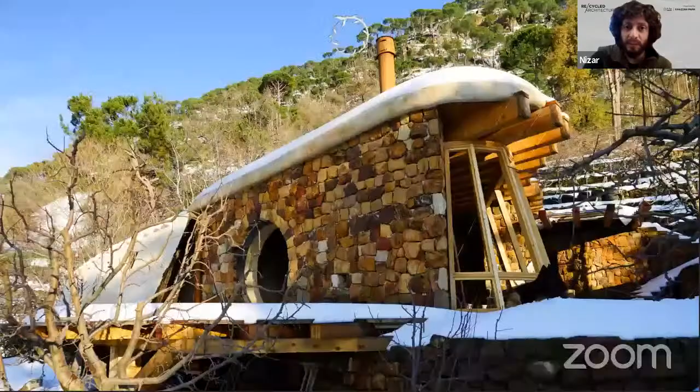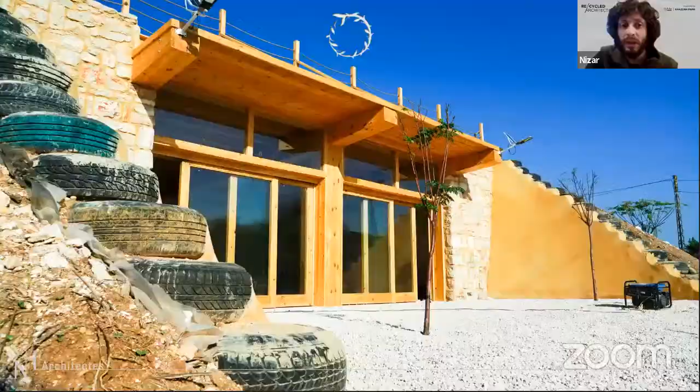It's melted in, and I assure you that inside the building the temperature is amazing in the summer. Here also, during another hike, this is a cub building also built with stone, and you see how discreet it is. These kinds of buildings inspired me a lot, and I was wondering why don't we take some of this knowledge and try to reimplement it in modern architecture in a subtle way, mixing it with modern scientific knowledge. So this is the Lifehouse, the prototype I did in Baskinta, which integrates a lot of ancestral knowledge. And this is another building we did, a multi-purpose hall with the United Nations Development Program in the south of Lebanon.

So one source of inspiration was all these ancestral techniques and buildings, but another source for me was Michael Reynolds, an architect interested in recycled architecture who created techniques of building with tires in the 70s, during the petrol crisis, because people felt at that time that we were very dependent, and we still are, on every petrol-based product. In this period he decided to develop techniques that consisted more of reclaiming thrown-away materials and doing something out of them.

So he did a lot of experimental things. He's an icon in recycled architecture. But also another guy whose name is Malcolm Wells, and he's also an amazing architect who was more into buried houses, which is also a very interesting concept in architecture that allows us to hide the buildings in nature, to reduce the impact of the building on the environment visually, and also get a very high efficiency thermal-wise, through the thermal mass of the earth. So yeah, this is one of the icons of buried houses, also Malcolm Wells. But there are also other sources of inspiration, other architects from Europe, from France, etc. These are the main ones.

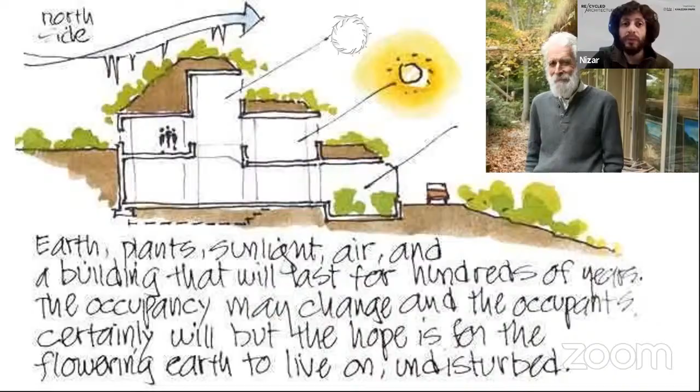Okay, so Nizar, tell us a little bit. What is your philosophy on the role of recycling in architecture, and how do you apply that in your projects?

So recycling means recycling garbage. It's a modern concept to talk about recycling, because in the past there was no garbage, no trash to recycle. All materials before the industrial era were mainly natural, and if some material like metal things were thrown away, they used to biodegrade, so we don't need to recycle them. They also used to reuse and remelt the metal to make something else out of it, so the approach before the industrial era was fully sustainable. They didn't have the choice but do it this way, because there were no plastics and petrol products.

One notion I noticed in modern days is that all of us live in a house where there is a garbage bin. We were born next to a garbage bin where we throw the Kleenex and things like this. So it's something that for us is part of our life, and we consider it natural, very normal. But actually, it's completely abnormal. It's something that was the result of this industrial era, and before, as I said, that didn't exist.

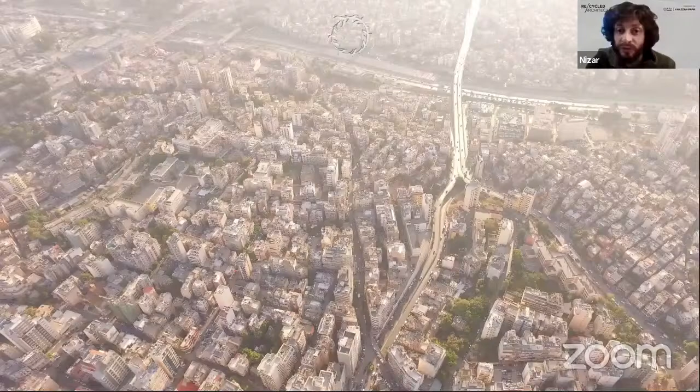So today we're overcrowding the planet with our buildings. We are invading it, and these buildings are not designed to biodegrade, to respect nature. As you see, we have a lot of concrete jungle here - this is an example of Beirut.

So I will talk about the phases one by one. First, we have the extraction of products from nature through quarries and mines, and the way we do it is very harmful for nature. We are sterilizing the soils and disfiguring the environment. This is a quarry in Lebanon - I took this picture from a plane, so it's huge.

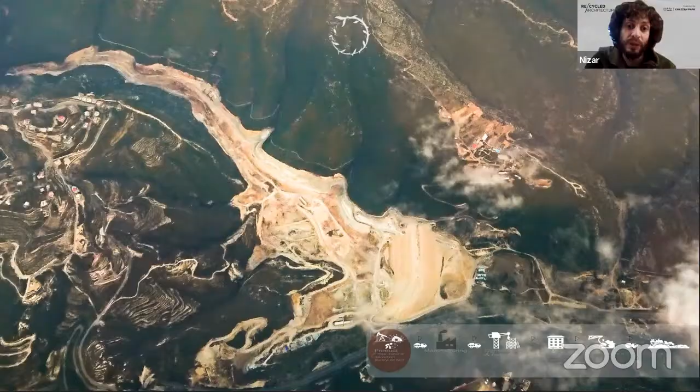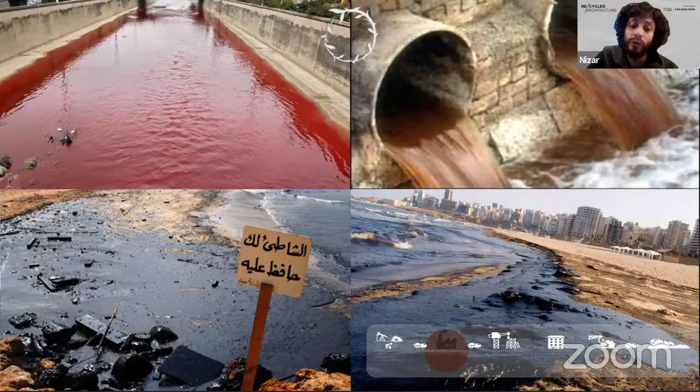So once the building is done, we consumers buy this building, and a lot of buildings label themselves as sustainable because they are painted green, or have a bit of wood inside, and then they say they are sustainable. But actually, all I said before was not taken into consideration to make us really sustainable. So the process is part of the sustainability of the building, not only the building itself.

So once we get this building built, it's time to know how to use this building and to see how it uses energy in an efficient way. So today, in most modern houses, we use electricity from the grid. When you use electricity from the grid, you're exploiting power plants that release a lot of gas. This is the main source of power today around the world.

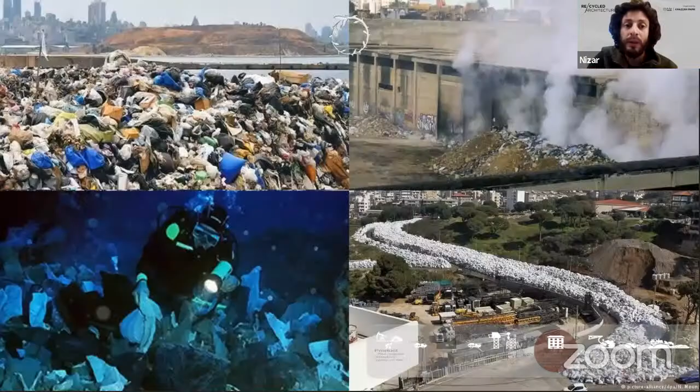Concerning the trash we consume during our occupation of the house, it's the same. We throw all the trash in dump fields, in landfills. And they end up in the sea, and as I said, all these animals end up eating this trash.

There's also one thing concerning the water that is not taken into consideration: the sewage water. In a lot of places there's a sewage grid that dumps the water in the sea. Unfortunately, in a lot of countries, even developed countries like France, they throw like 80% of their water in the sea.

So in addition to this, these houses, if they are not very well insulated, consume a lot of power, a lot of energy, to heat and cool the house. It's 40 or 50% of the energy consumption of the house that comes from heating and cooling.

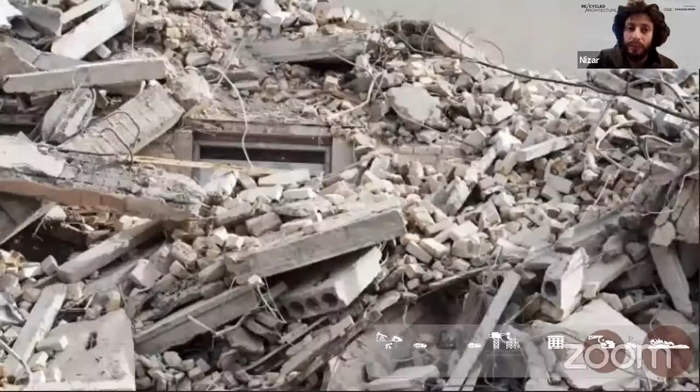And so once the building reaches its end of life, it's destroyed. Mostly all concrete buildings have approximately a 100-year lifespan, and then the concrete is not structural anymore, and it should be destroyed or reinforced with a new structure. So it's an unsustainable product that ends up in landfills, or maybe they use it to bury things, but it's useless actually.

So yeah, in my case, I decided to change all these phases into different new phases, a new way of thinking about architecture, and try to revolutionize it.

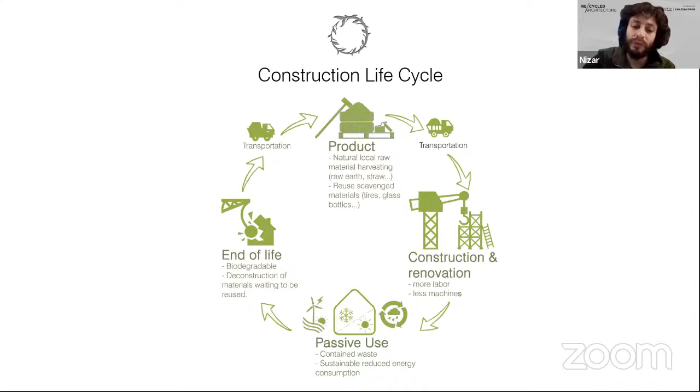So this way, I decided to adopt the principle of the R4: reduce, repair, reuse, recycle. They are written here by order of priority. We start by reducing before anything else. Then we try to repair, which is something being less and less done these days. We consume and throw away all the time. Then we try to reuse, repurpose, and find a different use for something that has been thrown away. And at the end, if none of the other three can be adopted, we try to recycle.

Very interesting R4 philosophy. I like it.

Nizar, does recycling automatically mean sustainable? I'd like to hear your input on that. Where does your practice stand with regards to both?

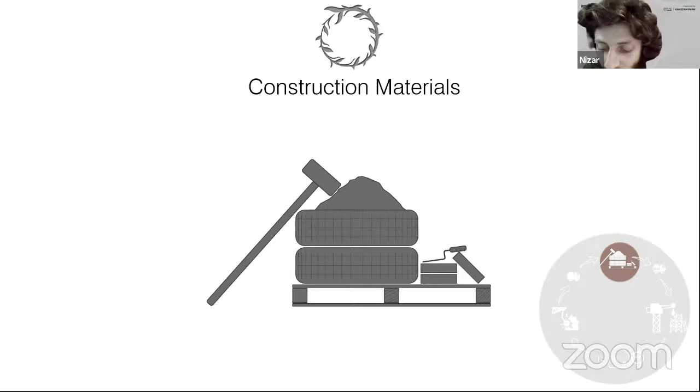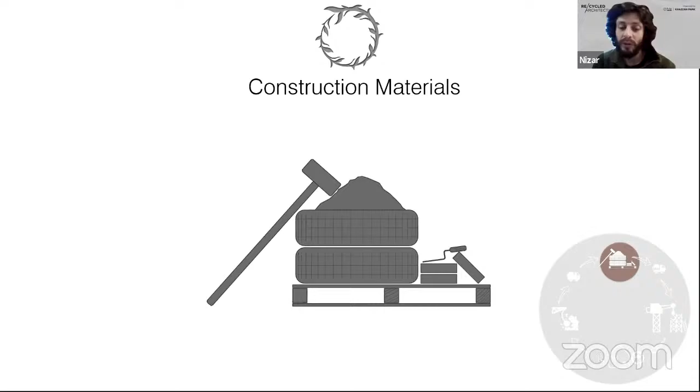I'm going to mention here mainly the materials we use most frequently - actually mainly in Lebanon, but in different countries they can change. So we started by using tires, used tires. I noticed it's an amazing resource. It's something that each day we have in Lebanon at least 600 tires that are thrown away. In the world, I cannot say how much. So we can know the amount of tires available and the power of a tire, because it's a very strong product that is not biodegradable and is very, very resistant to movement, to traction, to everything.

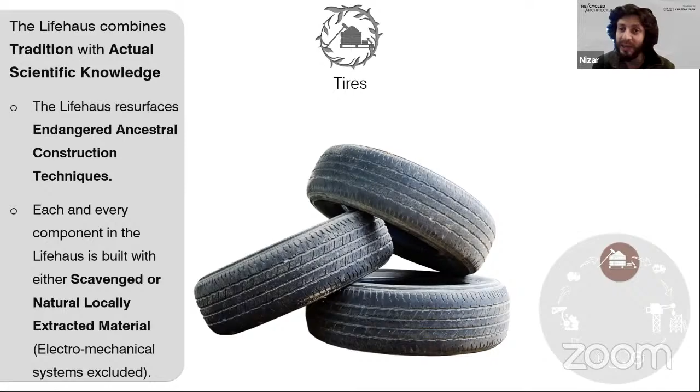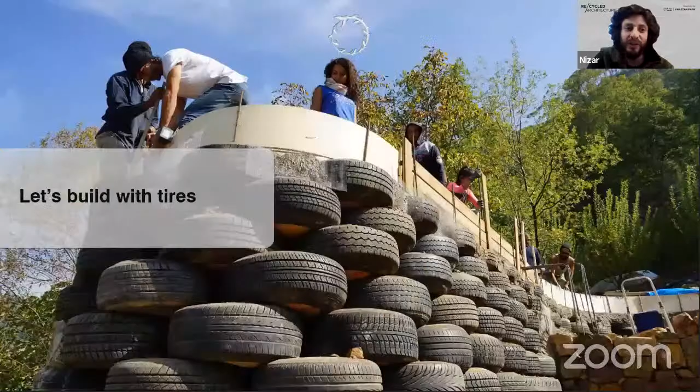So yeah, in Lebanon we usually burn the tires for manifestations, but actually in our case we use them for construction. So we fill them with earth, and we build with them retaining structural walls that are amazingly strong and anti-seismic, and they have amazing thermal properties.

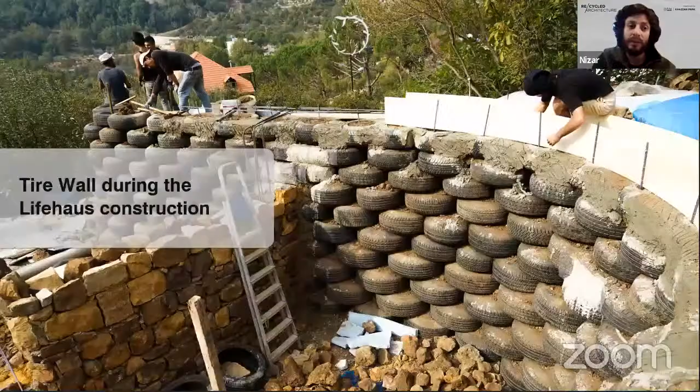Sorry Nizar, this image is of what? This is the construction of the Lifehaus, the first prototype. The prototype I did in Baskinta. Okay, this is also another point of view of the same building.

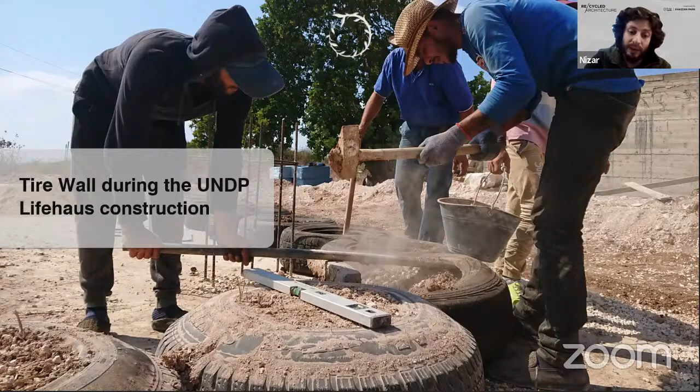So yeah, it's an amazing product. It's for free. It can replace concrete retaining walls, and it's anti-seismic. And yeah, we also used tires in the United Nations project we did in the south. This is the wall we did with them, so we use tires, and it's a very interesting material that should not be neglected at all. I think we should adopt it in a lot of buildings. In addition to this, we also use glass bottles that we cut and make bricks out of them, and integrate them in walls to let the light in.

It's like glass blocks, but instead of using newly produced glass blocks whose production is energy consuming, we use something that is being thrown away in huge quantities. I just have to talk to one pub, and each week he can give me hundreds of bottles for free. So these are the main two repurposed materials we use.

In addition to this, we also use wood chips for insulation, mixing them with straw and mud. We also use straw bales, mixing them with cob to make adobe bricks, as shown in this image.

This is an amazing material, part of our patrimoine, our heritage. In Lebanon and all around the world, before concrete blocks, people used raw earth blocks, which we call adobe bricks. We build walls with them, and they have amazing thermal, hygrometric, and acoustic properties. I don't know why these construction materials aren't used anymore today.

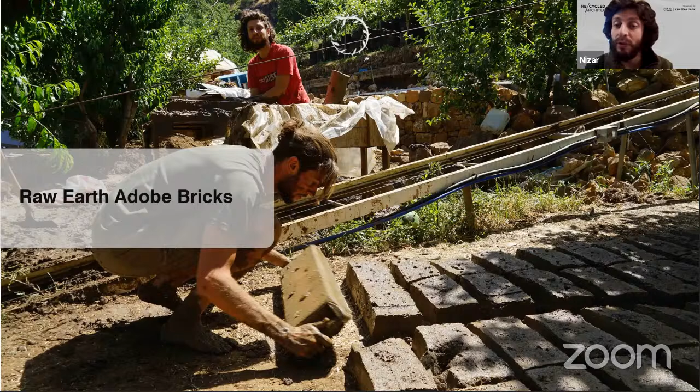We were able to pour approximately 300 bricks in 2 hours in the morning. It's a very fast production for small scale buildings, and it's easily implementable even in renovation, not just new buildings. We can use them in partition walls and things like this.

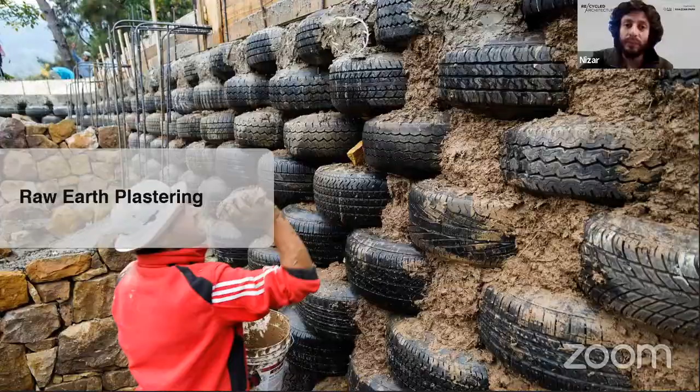In addition to this, we also use mud for plastering walls. Here we plaster all the tires with mud, and this is the result at the end. It didn't finish yet, this is only the earth. After this I have the later picture, but it's beautiful like this even if it's not finished.

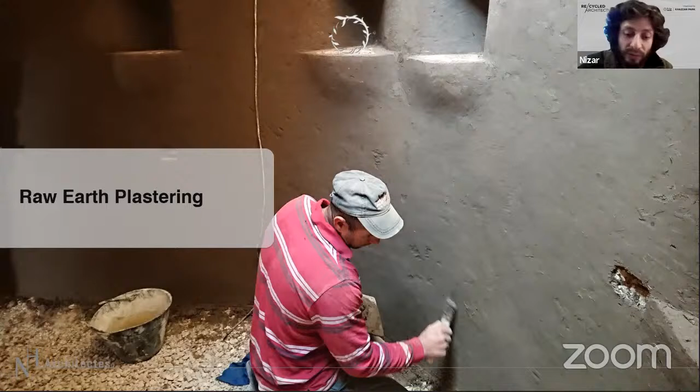It's amazing, but in small spaces it's a bit dark. In big spaces though, it's an amazing texture and color, very earthy. And as I said, it absorbs humidity and is very good for acoustics. In such a house, if it's completely empty without furniture, you don't get echo inside, unlike a new concrete house where you talk inside and hear echo. Here the acoustics are amazing.

One of the most important materials for me in Lebanon is stone. But for example, in deserts there's not a lot of stone, so there it's more about mud and sand, though there is a bit of rock too. It's an ancestral, typical material that's been used for thousands of years. In my case, I use it in masonry, not as cladding—we don't stick it to a wall, we build with it as a masonry.

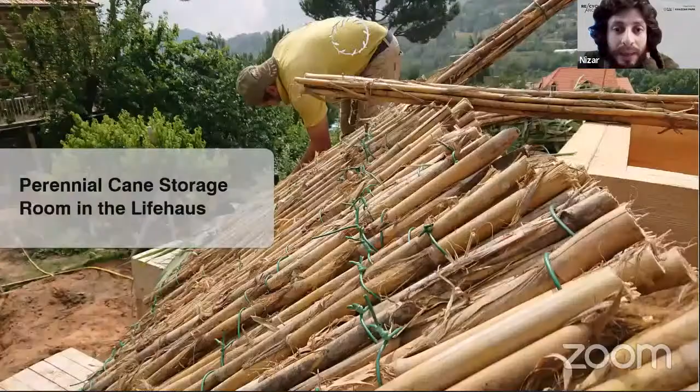Also a very interesting material we used here is reeds, cane, asab. We have a lot of it in Lebanon because there is water and the climate is moderate in the littoral, so you can make amazing structures with it. It's light and has zero energy consumption—just the small transportation to the site. We use it as a structure and also as insulation.

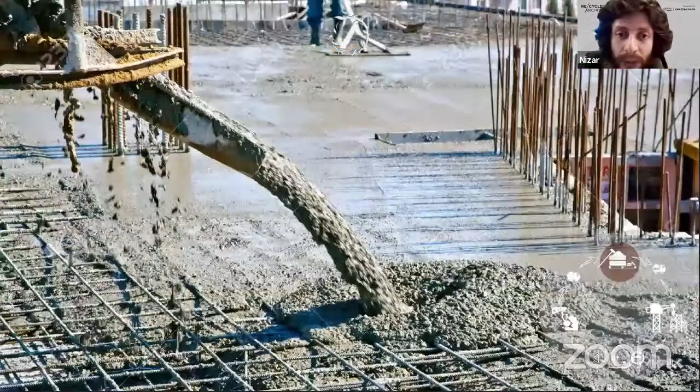Here in this wall, we put the reeds behind the stone wall and treat them to avoid insects eating them. So these are the main materials we used, but not the only ones of course. It depends on the site and on the culture of the people—if I'm building somewhere where they use bamboo, I will use bamboo, because I also implement the cultural aspect in the architecture.

So these materials reduce... you also mean the local material, correct? Like what is there, yeah, this is the most important. Culture is automatically associated with the local because that's how they used to build. The beauty is I don't have to figure out how they used to build—I just dig deep into their culture, find their techniques, and get inspired, not just mimic and copy it as is. The idea is to be inspired from them and mix it with all the modern techniques we have today.

So when we try to implement these natural materials, we can reduce a lot of energy consumption in what we call the gray energy—the energy used to process before we get the final product, the energy the product requires before being produced. In our case, it reduces approximately 80%.

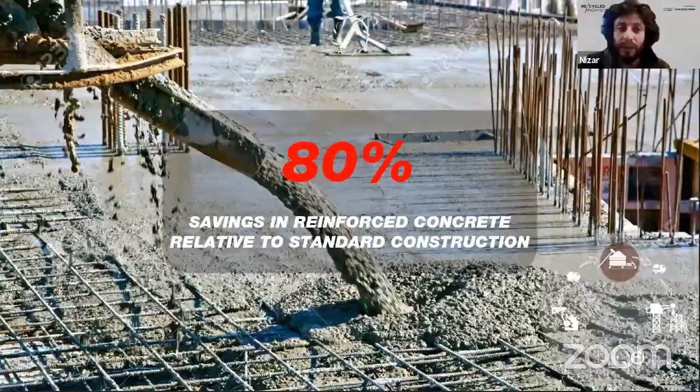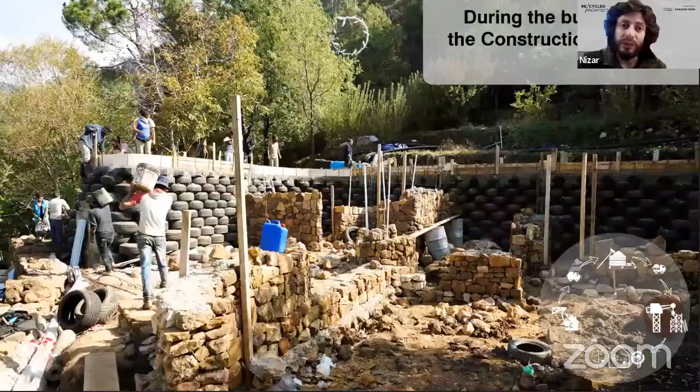And also it reduces the fact that we used a lot of natural material. We didn't use a lot of transport, which was based on local transport, stone from the village next to us.

In my case, these stones didn't come from quarries. They came from a guy who was excavating to build his building. So I got the stones from somewhere that is not disfiguring nature, from someone who's just building a house.

Amazing. Yeah, and also the trash coming out from the construction site was reused because they are natural. We reused the stone like gravel, small pieces of stone. We used the tires to make things for the kids, like tunnels, that they can play in.

And the styrofoam here, which is of course not a sustainable material, but in our case there are some things we cannot replace for the moment. We used it to fill the back of the house as insulation.

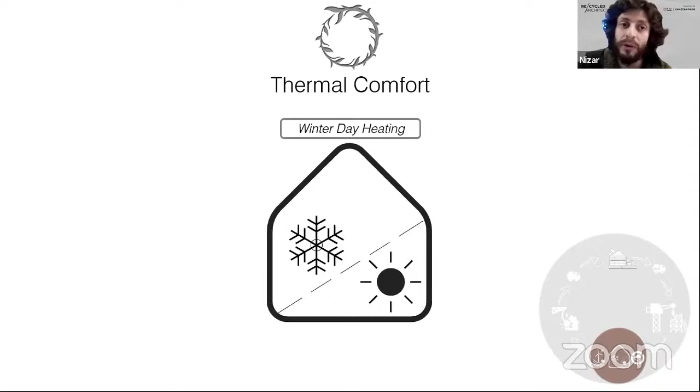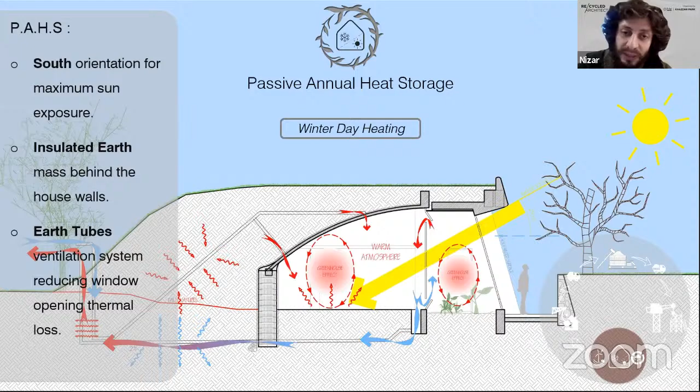But the most important thing concerning what makes a building sustainable is the design, the architecture of the building, which makes it require minimum energy to cool and heat itself. In my case, I use the concept of thermal mass that stores the energy of the sun in summer and restitutes it in winter. I also take into consideration the path of the sun and its angle. During winter it penetrates into the house through the south facade, and in summer it doesn't penetrate - it's shaded, so it just penetrates into the greenhouse to help grow tropical food.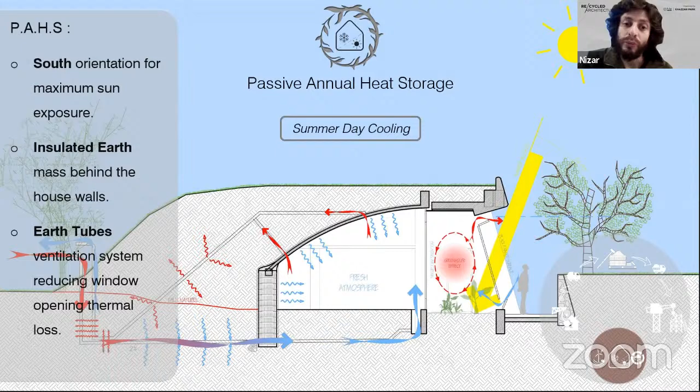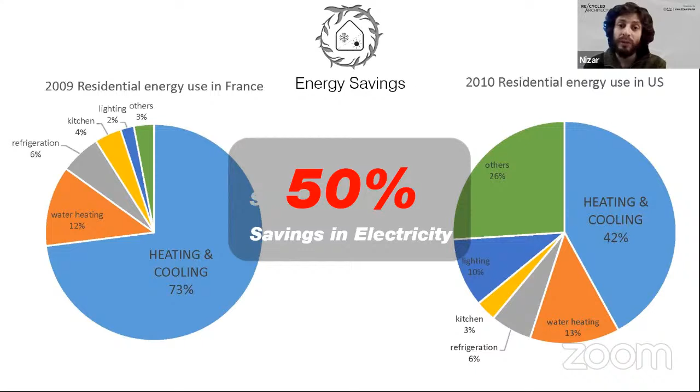This is named passive design, and it means the building relies on its design, its architecture, to heat and cool itself, and doesn't need any source of heating or cooling. This way we reduce 50% of the consumption of a building.

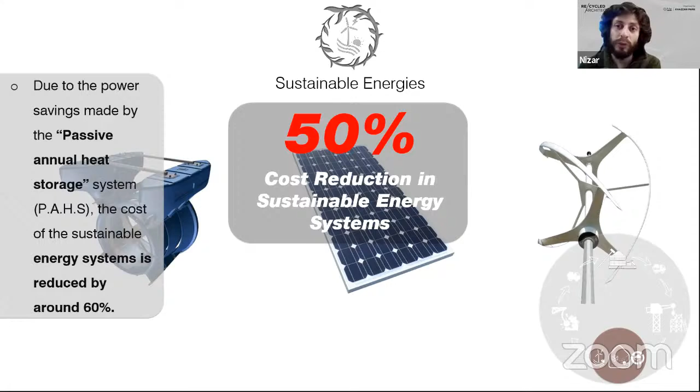For power, we are also using sustainable power - any of these three, water, sun, or wind, depending on each place we are building on. That's why I consider that Lifehouses cannot be considered like prefab houses, where we do one module and put it everywhere, because it adapts to each site we build on.

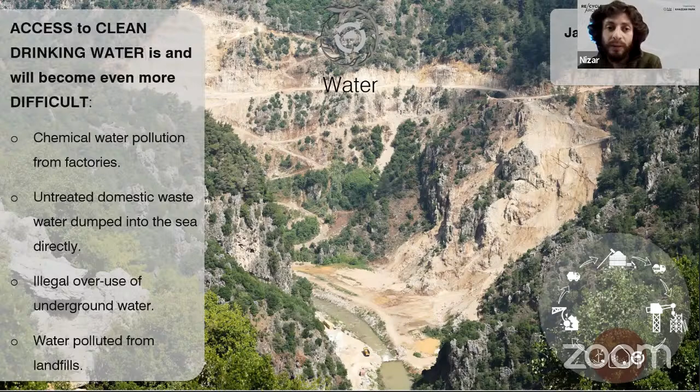So then we have the water, because in our case we consider recycling tackles water too. We recycle our water - we take the water from the rain and we recycle it 4 times. Why do we take it from the rain? Because we found that rain is the most sustainable resource, before taking it from underground water or from dams that, as you see in this picture, are disfiguring nature - in one of the most mythical valleys in Lebanon that has a lot of myth and culture around it, it has been completely disfigured just to build a dam.

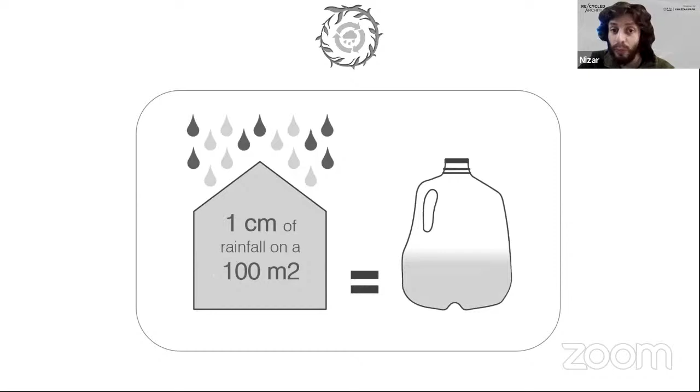So this is a challenge for us, and we consider that rainwater is enough in a lot of regions to help store the water we want.

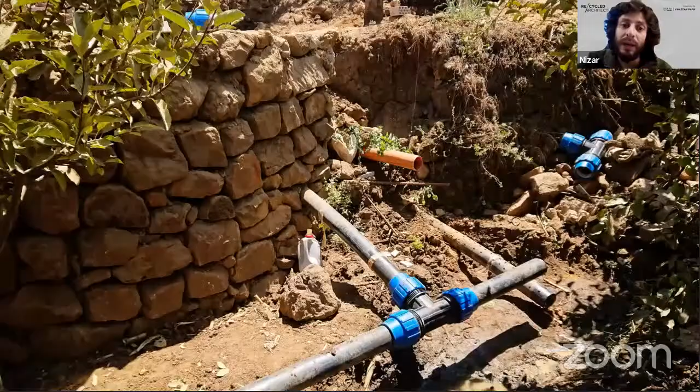Now, concerning the way we recycle the water in the Lifehouse: we start by harvesting the water from the rain. We store it in a water tank, then we filter this water. Now we use this clean domestic water for the sink and the shower. After this, the water is named gray water.

This water is not extremely toxic, so we can use it. It's very rich in organics, and it can be used for irrigation inside the greenhouse, in botanical cells that will filter this water. They take all the nutrients from it, and then they give it back to the toilet flush. The toilet flush transforms this water into black water, sewage water.

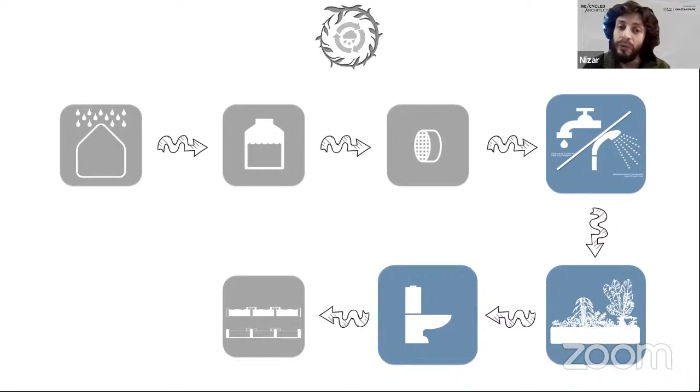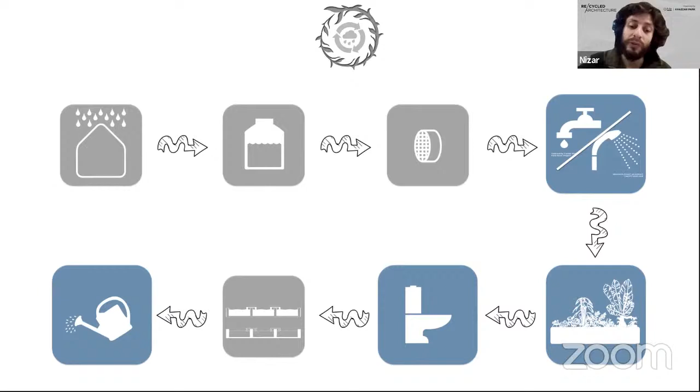Then this water goes to a septic tank. In our case, we did a biodigester, which is a kind of septic tank that stores the methane released from the solids to use it for cooking. So we generate our own gas too. Then after this, we filter the water even more in reed beds, and we end up using it for irrigation. So the system is completely contained, and the water is reused 4 times.

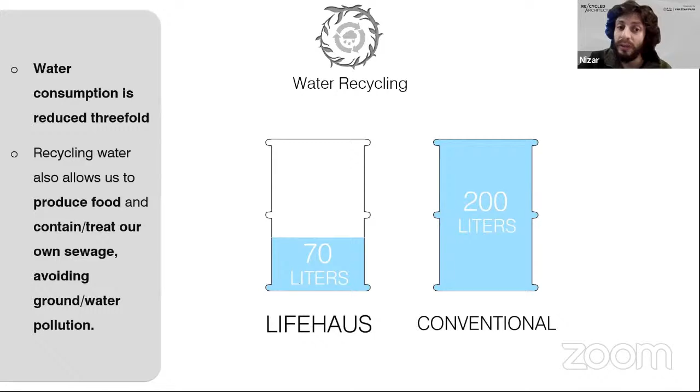This way, we don't need a lot of rain, because we're using less water. So instead of using approximately 200 liters per day per person, we're dividing it by 3. In addition, there are other systems like vermicomposting systems and reed bed systems that help filter the water naturally with no need for any technology.

So yeah, so that's it.

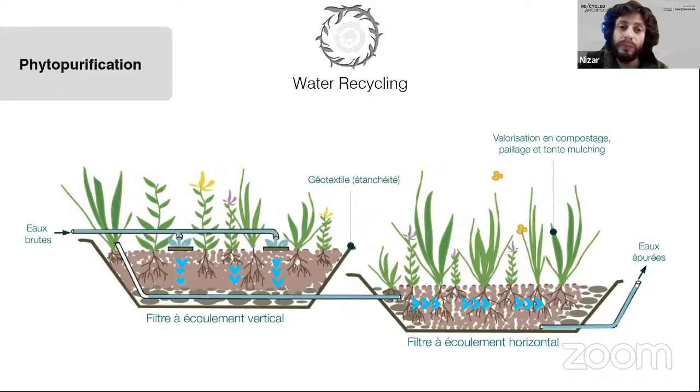Okay, amazing. Then I need you to state one environmental opportunity and one challenge you had to face while designing or constructing your project. We had a lot, but I will just talk about, for example, especially—you can say more than one if you wish.

Especially in my place the land is very tricky, because it's very steep, and the soil is completely unstable. It's not rocky, it's very muddy, and there's a lot of water. So we had a big struggle to fix the foundations of the house. The main problem was access to the land, because we didn't have a road, so it was all built by hand. We didn't have machines to help us excavate; we used them just for the beginning, and then after that we had to do everything by hand. So this was a big challenge we had.

In addition, one of the good things we had is that we have a river next to us, which is an unlimited source of water that helped me reduce the water storage tanks. I don't have to rely only on the rain, but in the summer I can take some water from the river. So these are two challenges.

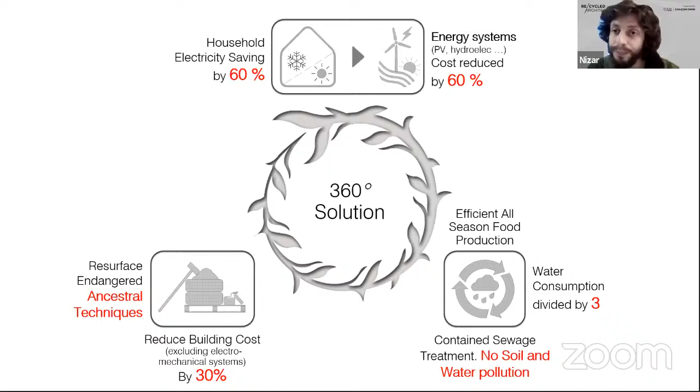Yeah, so that's it. Okay, so I know you have a video you'd like us to see, and then maybe after that we can go with the Q&A from everyone. We have some questions, but let's probably see the video first, and then go through the questions. Okay Hala, before the video I was interested to show some pictures during the construction of the LifeHaus, so let me share the screen again.

So sure, okay, let us see that.

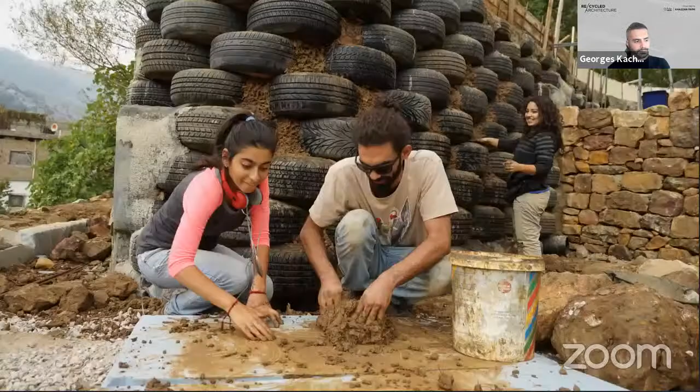I wanted to talk a bit about the interesting community aspect of the construction, because it wasn't only workers building—we had a lot of volunteers, people interested to learn how to build naturally. So it was a very interesting way to teach and sensitize people, showing them that we can build differently, in a different way, with the same amount of comfort required in modern days.

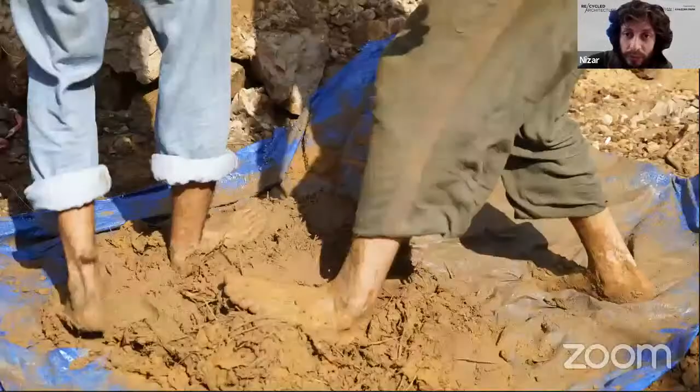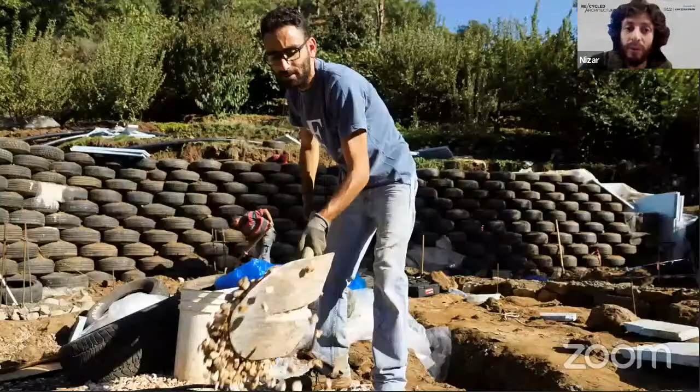So as you see here, there are women—usually we don't find a lot of women on construction sites. There are also foreign people from all around the world who came and participated. Here we were doing some experiments on earth plastering, testing which mix is best, etc.

There's a very interesting thing here: the foreman of the construction is an Egyptian guy who used to make earth bricks as a kid in Egypt, and he shared his experience and knowledge with us, giving a beautiful input into the construction. This way I learned that we architects think we are the gods of the site and know everything, but actually each person on site has particular knowledge, and we can listen to any one of them.

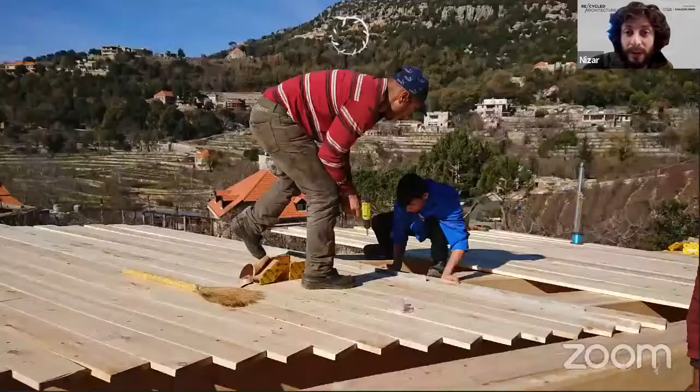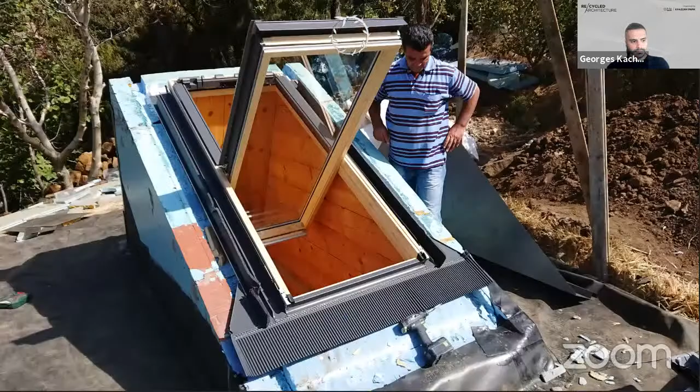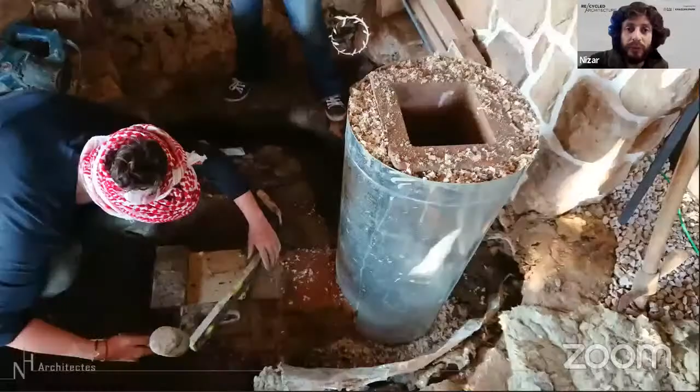And we used also some modern stuff like Velux, and here we used a system of heating and cooling, or heating only, which is a wood stove named rocket mass heater. That is something you can do yourself. It's a low-tech stove that is extremely efficient, restituting 80% of the heat generated from the wood.

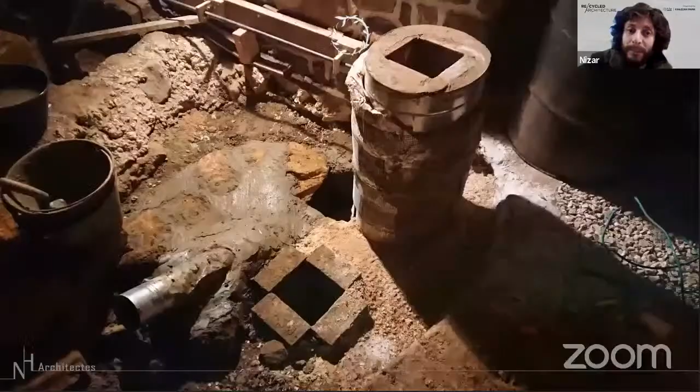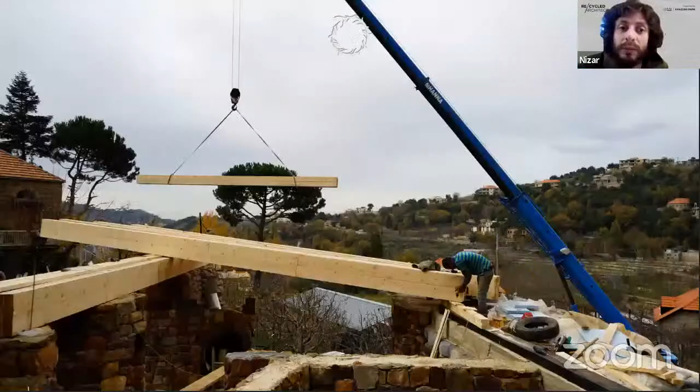You can do it with natural materials, bricks, mainly fire bricks. Also, the ground is done with mud that is stabilized with linseed oil. We also use tires to make a form to build a stone on, and we take it back after. We use a lot of wood too. Wood is also a sustainable product, but we should be sure we're getting it from FSC certified forests, where when they cut the trees, they replant 7 more.

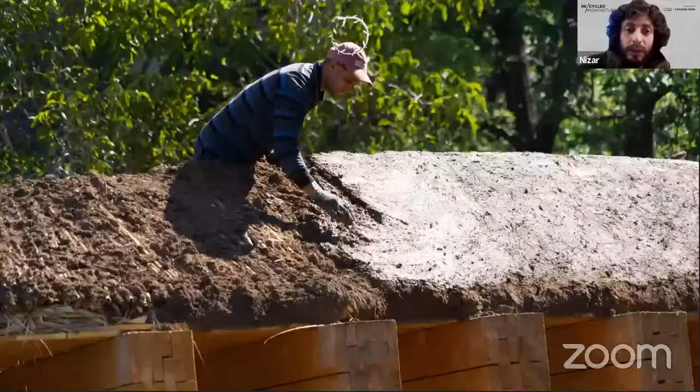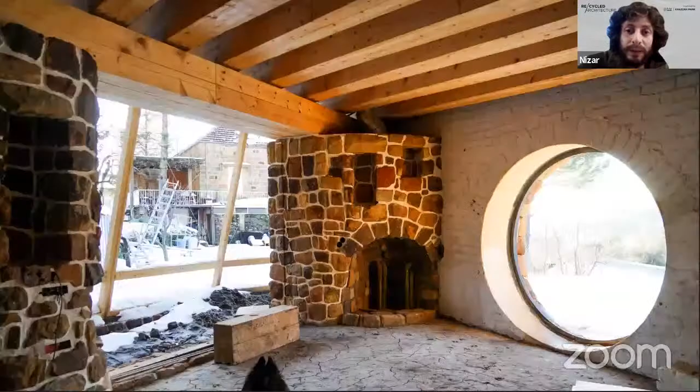There's snow where we built the house, and we will not need to heat the house at all. So yeah, it's time that we adapt to the earth and not the earth adapt to us. Absolutely, that's it.

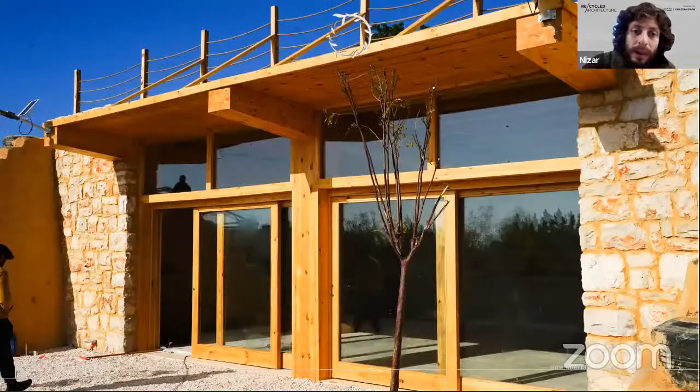Here I have also some pictures of the UNDP project we did. I can show them fast. It's completely buried - you can't see anything except the main facade, so it's a very discreet building, and it's working perfectly well. The temperatures are amazing in the summer and the winter with no need of any source of heating or cooling. Even the texture of the mud bricks is amazing - we don't need to treat it, we don't need to do anything.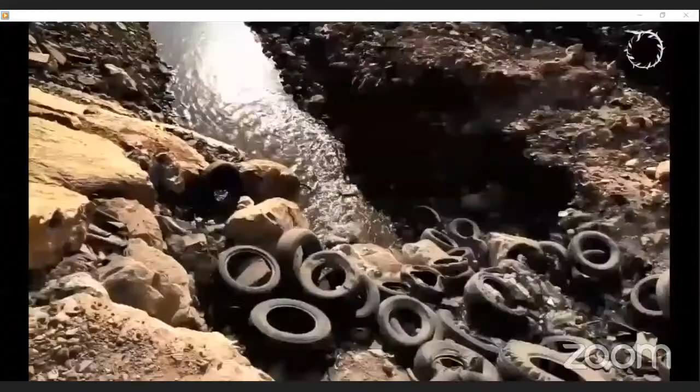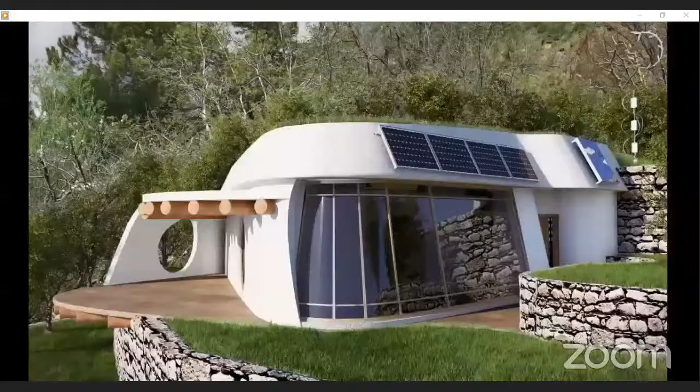Imagine living in a home where you don't have to pay utility bills ever again. Imagine growing your own food, generating your own power, and benefiting from a renewable source of water. Imagine living in a home that reduces your consumption of resources without reducing your quality of life, that reduces your waste output as well as your carbon footprint. Introducing the Life House, a revolutionary home developed by Lebanese architect Nizar Haddad. This resource-efficient ethical home will change the way we live and the way we impact our world.

The first Life House, a fully functional prototype, will be built in the Lebanese town of Baskinta. The project is perfectly adapted to this country - it's an answer to all these crises in the country, not only the garbage crisis, but the water and the electricity crises.

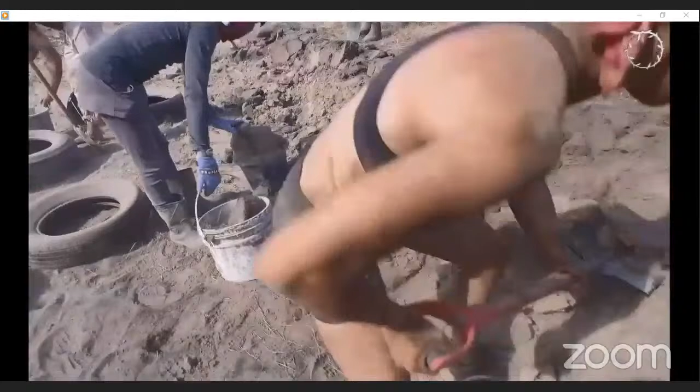First, we are in the beautiful land of Baskinta, and here we will be building the first prototype. It's a self-sufficient home that provides you with your own electricity, your own water, your own food. We are using many materials, mainly all scavenged materials, all we can find on the site we are building on. It can be natural material like earth and stone, and it can be straw, and it can be also garbage. But for us, the garbage is gold.

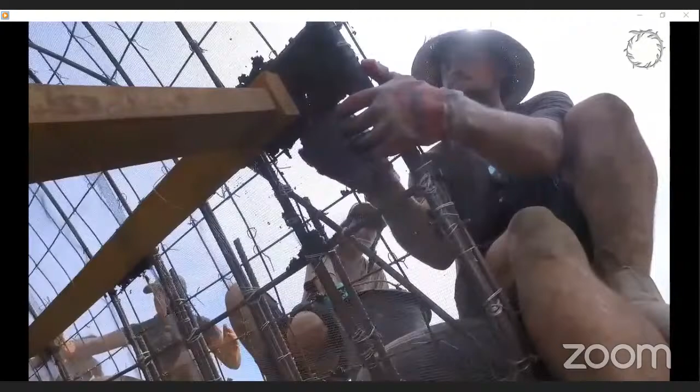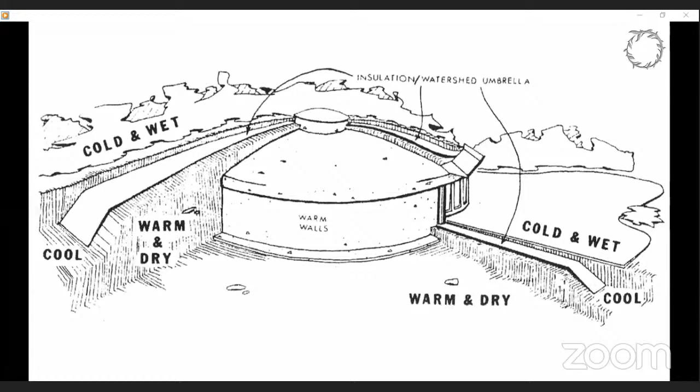We are helping the garbage crisis by using recycled materials to build the house, like tires, old electrical poles, glass bottles. We can start by having thermal comfort in the house without using fuel, using a very interesting technique called passive annual heat storage.

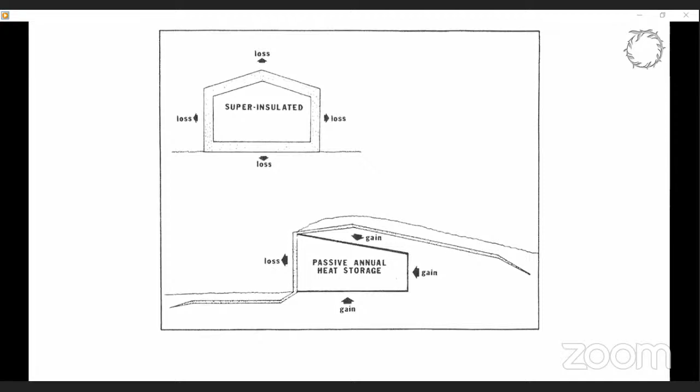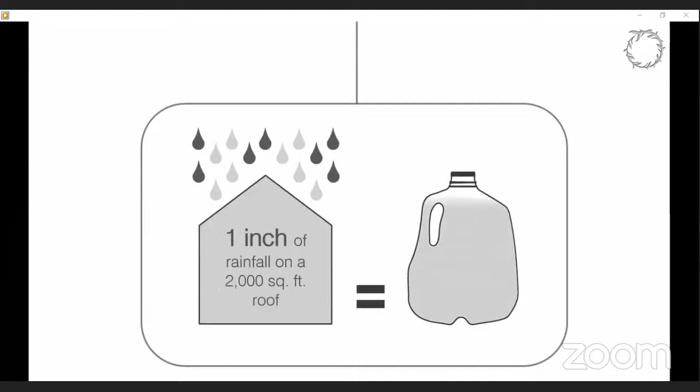The concept is to absorb the heat of the sun in the summer by the earth, to store it, and to restitute it in the winter. Then we start upgrading by integrating different systems to reach self-sufficiency, like rainwater catching and recycling, integrating photovoltaic panels, and trying to reach food self-sufficiency by integrating permaculture, aquaponics and hydroponics.

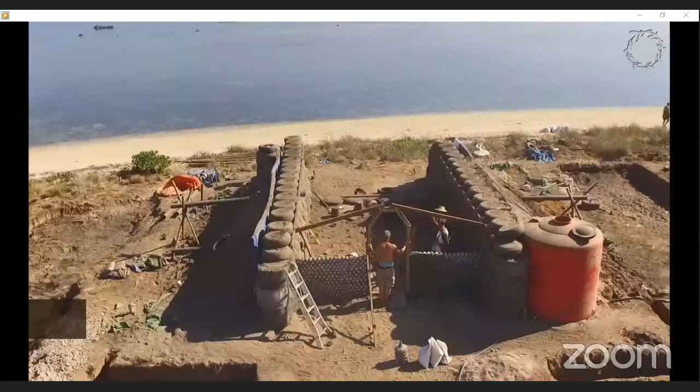We went to Indonesia, me and Nizar, and did volunteering work. We helped them build a self-sustainable bungalow from zero to finish in 30 days. Any endeavor like this is worth putting your time, money, and presence into.

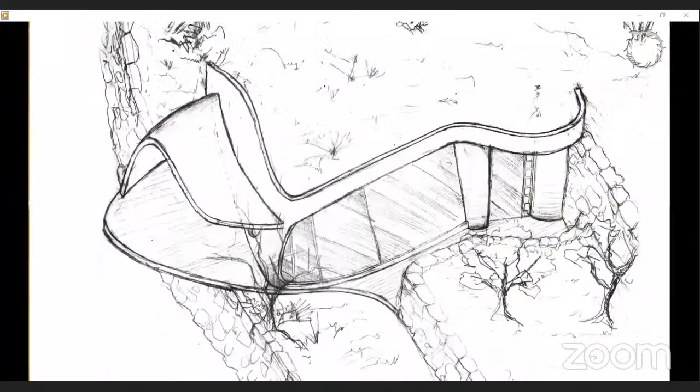This concept and many others like it have encouraged people to add their own spin to it. One such endeavor is the Lifehouse Project, the first 100% self-sufficient green building in Lebanon and the Middle East. That's what really pushes sustainability into the next phase. It's inspirational, and this cross-fertilization is always what pushes things beyond the borders we've got today.